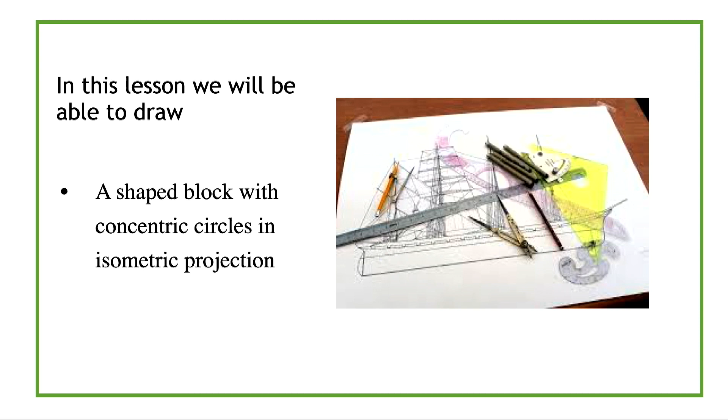To draw this given shaped block in isometric projection, as usual, we determine our point X, which is the starting point for our construction and the nearest lowest corner on our object. All dimensions are in millimeters. The height is 130, the width of our front is 80, and the depth is 70.

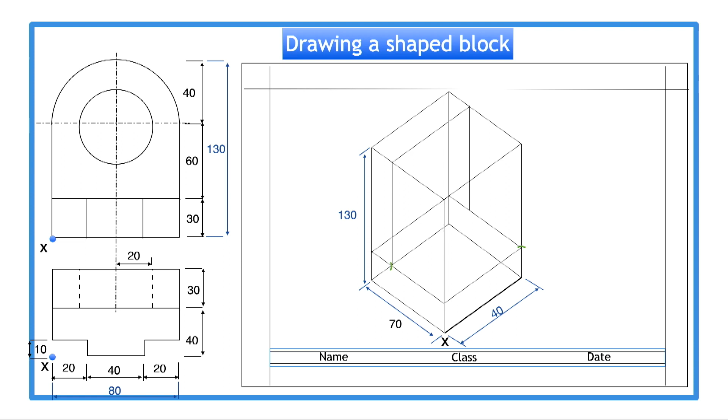On the front view, the height 30 gives the platform-like feature which we draw in. On the top view, the dimension 30 gives the depth of the vertical wall-like feature which we mark in and draw in. All lines are drawn with the T-square and 30-60-degree set squares as shown in the previous lessons.

To draw in the semicircle, we first draw in our center lines. We now add the crate for our semicircle. Note that whether we draw a full or half isometric circle, we draw a full isometric square as crate, with side equal to the circle diameter.

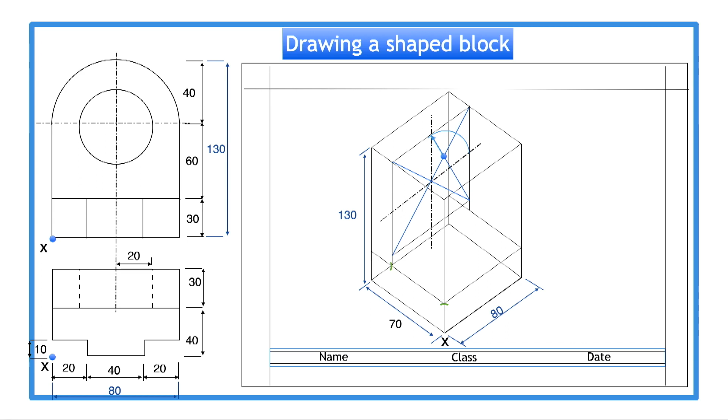We add the long and short diagonals and cross the longer diagonal with lines from the top midpoint to the right corner. From the intersection with the longer diagonal, we get one center and radius and draw in part of the circle. From the intersection with the shorter diagonal, we get another center and radius and draw in the other part of our semicircle.

The outline can be lined in with our compasses. Remember that all arcs and circles are drawn in with compasses. To draw the semicircle at the back, we bear in mind that the distance between the crate of the front semicircle and the back semicircle is 30 millimeters, indicated by the green arrow. This distance is therefore used to offset the top center and radius to the back.

The quarter circle is drawn in, and the same thing is done for the lower center and radius. We now add the isometric square crate for the inner circle and draw it in the same way as the previous examples. We draw in the outline.

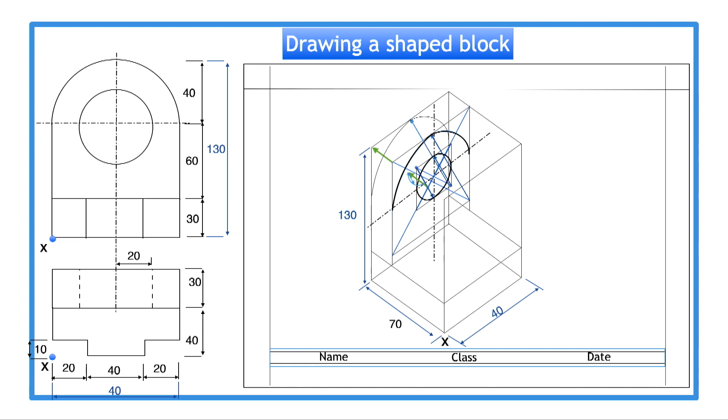And for the inner circle as well, we will draw the back edge of the lower circle by offsetting the radii through the depth of 30 millimeters. The outlines are lined in.

To draw in the details on the lower platform, we take the first line, which is 10 millimeters inside the corner, and mark it off with our compasses and line it in, followed by a construction line for the corresponding line on the other side. For the 40 millimeters line at the edge in front of the platform, we step in 20 millimeters from the corner and mark it off, as well as on the other end.

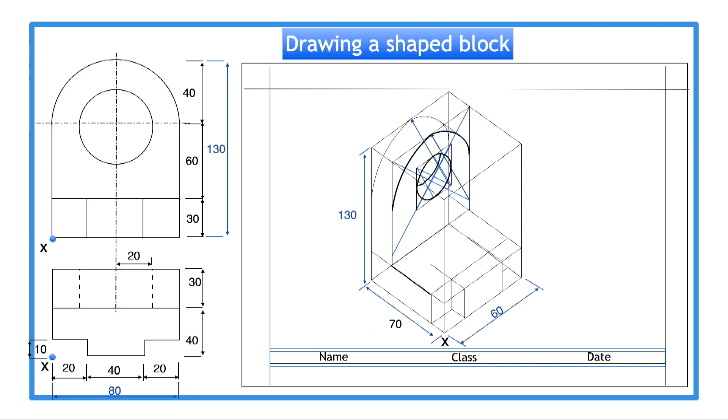Projection lines are drawn into the platform. We then project height lines below. The construction is completed by adding a tangent to the semicircular part as such, and the rest of the edges are added as well. This is what our completed outline will look like.

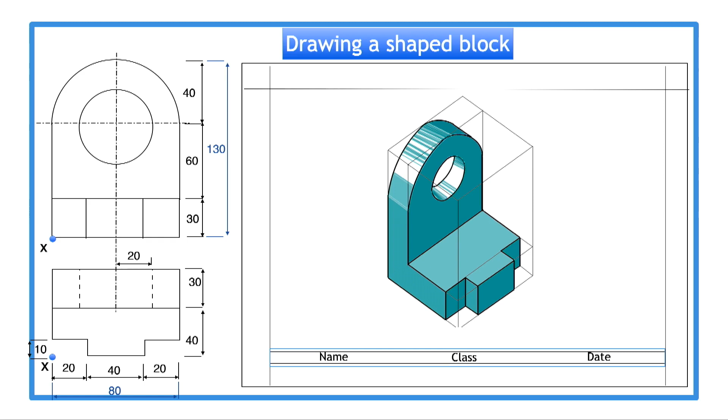Using the thick and thin line technique will give us this. You can also use any color of your choice to render out your isometric block. In this lesson, we have been able to draw a shaped block with concentric circles in isometric projection.